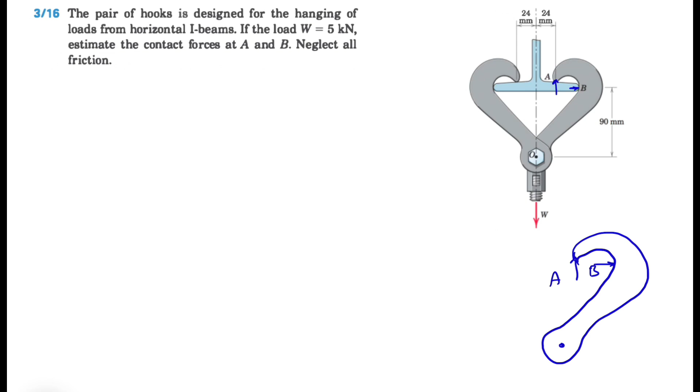First of all, we have different forces in the free body diagram. Because of the symmetry of this shape, we can just pick one half of this hook, which we're going with the right side. So at point A we have one normal force here and one normal force at B, and since we don't have friction, for A we don't have any horizontal component, and for B we don't have any vertical component, and we have some sort of pin at point O, which means we have both X and Y components, and we have W below these two, so we have two of these hooks that are connected at point O.

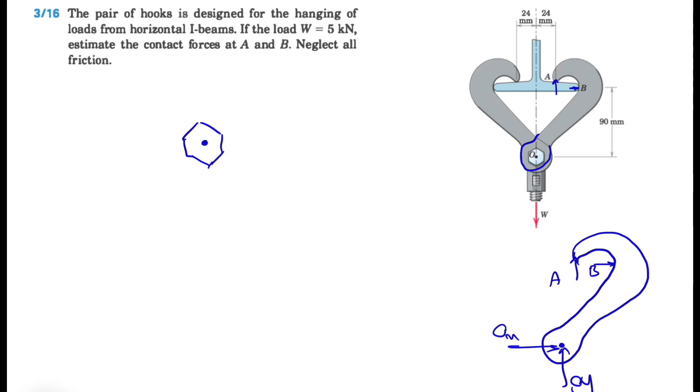So in order to get rid of some of these unknowns, if we look at the free body diagram of this point O, we have the force we called OY, which since we consider the force from point O to the hook upward, we're going to consider this one downward, but obviously that's not the right way to show it. So this will be our W, and this OY is from the right hook. We have the same thing from the left hook, meaning that for the Y component of O, we have two different forces.

So if we do the sum of all forces in the Y direction, since we are in equilibrium, we have minus 2 OY minus W is equal to 0, meaning our OY is W divided by 2, or 5 over 2, which is 2.5 kilonewton. We'll get a negative sign here that shows that OY has to be upward, the right direction. So in this free body diagram, the correct direction for OY is downward, so we can correct it here.

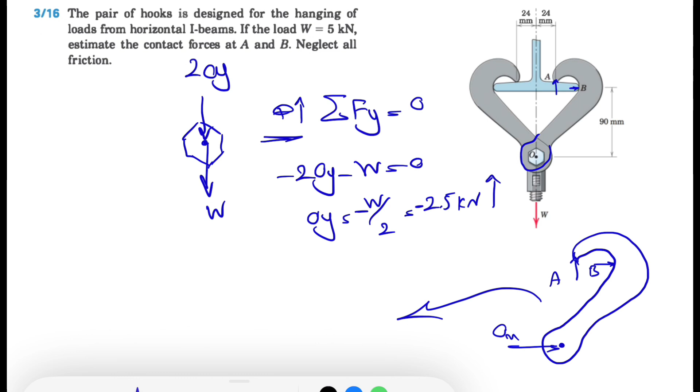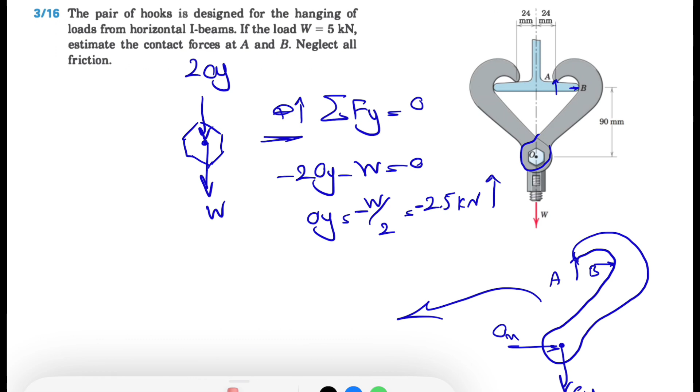So this is the correct direction for OY, and we know that the direction for B will be to the right, so our OX actually has to be to the left in order to satisfy the equilibrium condition. But again, it doesn't matter, we can just proceed with what we assumed at the beginning. We're going to get a negative sign at the end that shows that our assumption was incorrect. So we know that our OY is 2.5 kilonewton now, so we're going to do the sum of all forces in the Y direction.

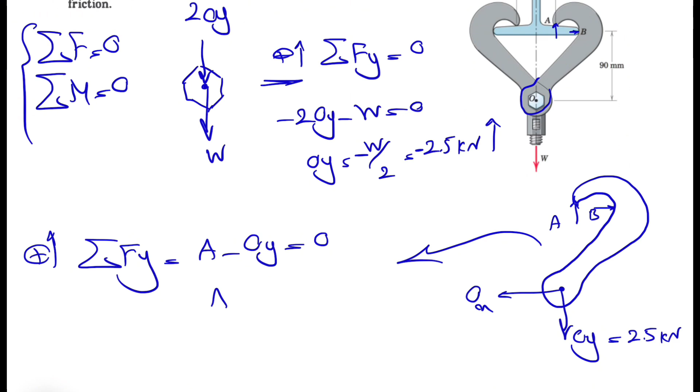Again, we are in equilibrium, we have two main equations, sum of all forces equals 0 and sum of all moments equals 0. For sum of all forces, we have both X and Y. So in the Y direction, we have A minus OY is equal to 0, meaning our A will be 2.5 kilonewton. So that's one of the unknowns that the question is asking. And for finding the other one, we can do the moment about point O. That way we get rid of all the unknowns at point O, and we can find the other unknown,

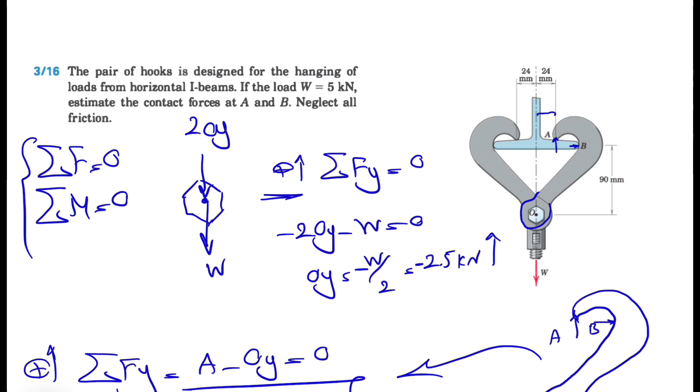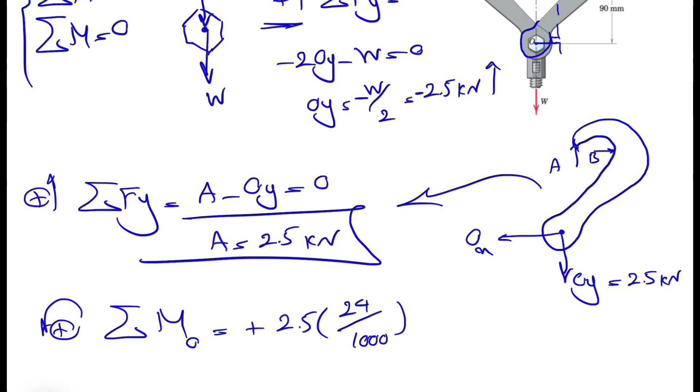B. So if we look at A, we'll see that A is going to make a counterclockwise moment, so it's positive 2.5 times the distance. So this is the line of action, and the distance that we are looking for is this distance, 24 millimeters, 24 divided by 1000, and we have the moment of B, which will be a clockwise moment, so minus B times the distance from point O to here, which is 90 millimeters. So 90 divided by 1000 to get it in meters, equals 0.

And as we can see, we don't need to do the unit conversion here since it will be cancelled at the end of the day. So if we calculate our B, we get 0.667 kilonewton, or 667 newtons, which will be the final answer for this question. So yeah, that's pretty much it for this one.